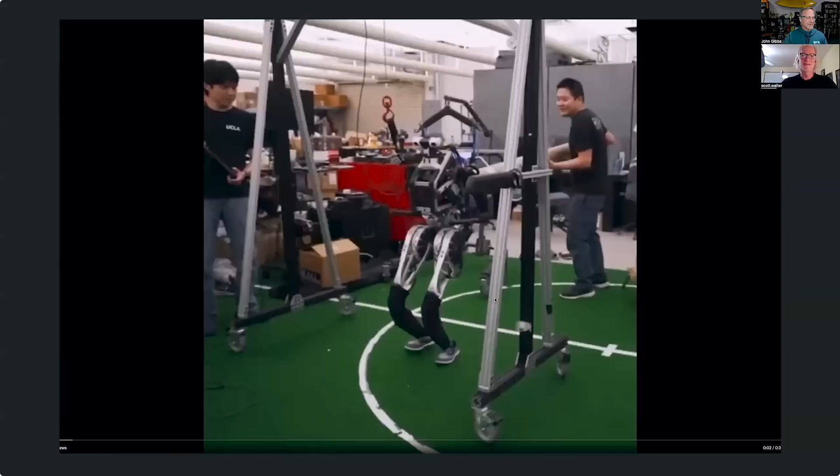I was sad about that one. Okay, I just blew up the screen. Can you still see that? Okay. Twitter's video, Elon Musk needs to fix that still. The video is still less than ideal. But anyway, I've turned off the sound for all of these so that we can talk over it, and I will leave the links in the description so you can go look at it yourself. So you can see that this is a lower body test.

Is he wearing Nikes? Yeah, he's wearing some kind of training flats. I'm not sure whether they're Nikes or not, but it's rather interesting that it's off the shelf. You noticed that this robot is constantly walking even when it's standing still. Yeah, it seems very nervous. Even when it's not moving, its feet are going up and down, I'm assuming because it wants to be ready. Right, it expects to get pushed, so it wants to have everything already running.

And of course, with the legs being bent, there is a little bit of cheating involved. I always say it feels like a toddler walk when they keep their legs bent. Yeah, you can lower the center of gravity that way. But it is reacting really well to being pushed. And this is part of the testing. Dennis retweeted this today and said, if people are upset about this robot being pushed, it's part of the required testing to show that it's functional.

It's stable, right? Because suddenly you can have an outside force that comes in unexpectedly, and you need to see how quickly your control system can react. So what's really impressive is that it has a planned trajectory, something it wants to do, and then suddenly something unexpected happens from the outside. Right. A random event, and it has to recover very, very quickly.

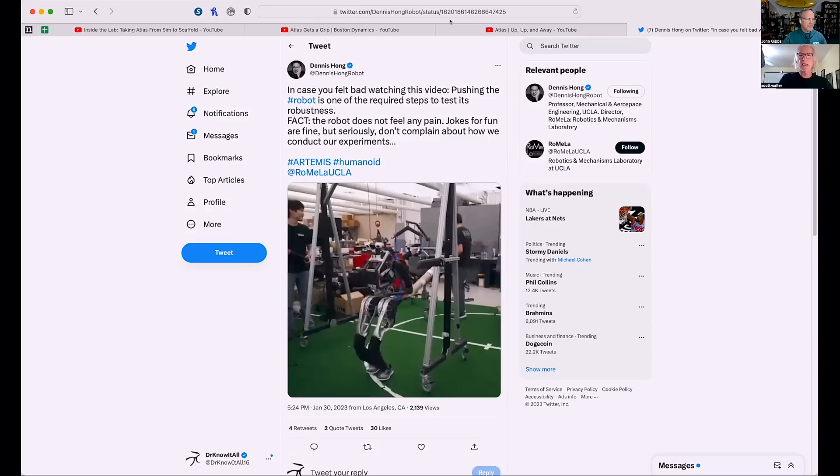And the other thing to notice is that it's not like it recovers in one step. It's trying to dissipate the whole problem that's going on there. Right. So it seems like the strategy is, you don't fix it right away. You try to do something to keep yourself from falling down and get yourself into a slightly more stable state, and then put something else down and it gets a little bit better and a little bit better. And we're sort of used to that.

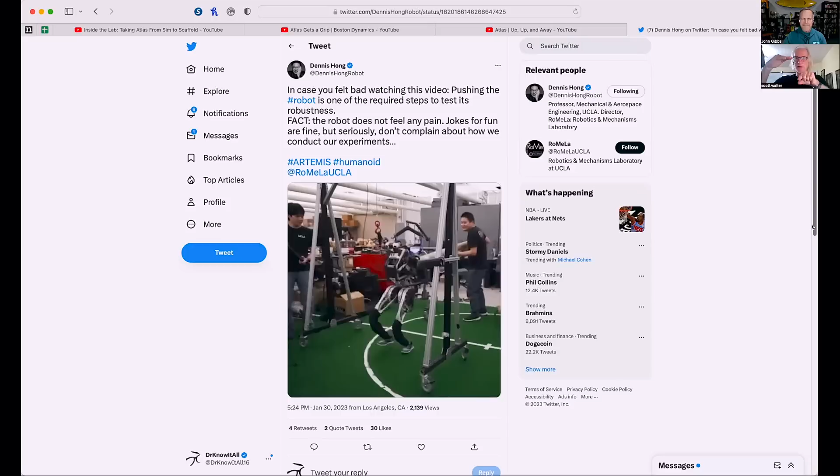If you look at any kind of control system, you try to get up to some level and you're going up like this, and you overshoot, and then you have to come back and eventually get in there. And John, what is that called? When you overshoot in your control system, you get that peak that comes up and goes back down and it wobbles back to it. Do you know what that's called?

I'm sure I do, but I'm just blanking on it right now. What is that? You're absolutely blanking on that, huh? In control theory and Fourier transforms, when the Fourier transform doesn't exactly fit a step function, that little overshoot is known as the Gibbs phenomena. I should have guessed that. I pretty much figured that had to be it.

Yes, it's the Gibbs phenomena, and that's what I refer to, like in the car with ego. When the steering wheel kind of does one of these things back and forth when it's trying to get itself straightened out, I'm going, oh, there's the Gibbs phenomena. It has nothing to do with the way you drive, John. Yeah, that's right. It's all about me.

Have you noticed that the overshoot and the corrections in the turning have gotten better with the last couple versions of Full Self-Driving, at least for me? Oh yeah. There's a turn in my neighborhood where it used to be just like that. And now I have a couple of roundabouts that are kind of small that it just goes through really smooth. Before, it was definitely tessellating the curve, not the way you want to. And now it's like this really nice spline going through.

It was good about 2 or 3 releases ago, and then the latest one about a week ago, it's even smoother. There's still an improvement there. And a few other places, and still some things where it's like, oh, they still haven't addressed this issue and that issue and a few others, but it's improving.

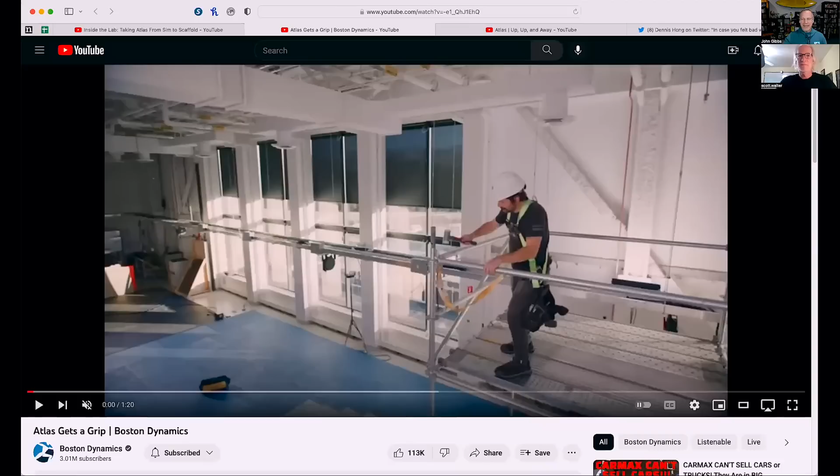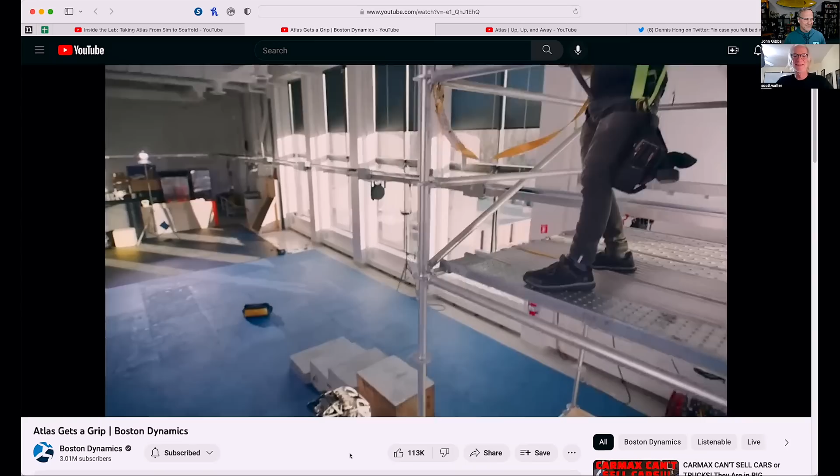But in the meantime, let me show Atlas Gets a Grip, which is the finished video. I think this is actually in some ways the least interesting video, but it's so that people get a sense of what's going on here. Yes. But then they have a couple of behind the scenes that are great. So this guy's like, oh, I need my tools. Atlas, come get me my tools. So there's Atlas. Okay.

But one big change here is that he's got grippers now. Yes. So he's able to actually grab and interact with something like that. Right. Put that up there. So this is all very good. The apprentice is doing what they're supposed to here. He seems to be very eager to help out the boss. And that, by the way, is a soft bag. It's fairly full, but that is soft. So that requires some dexterity to pick something like that up.

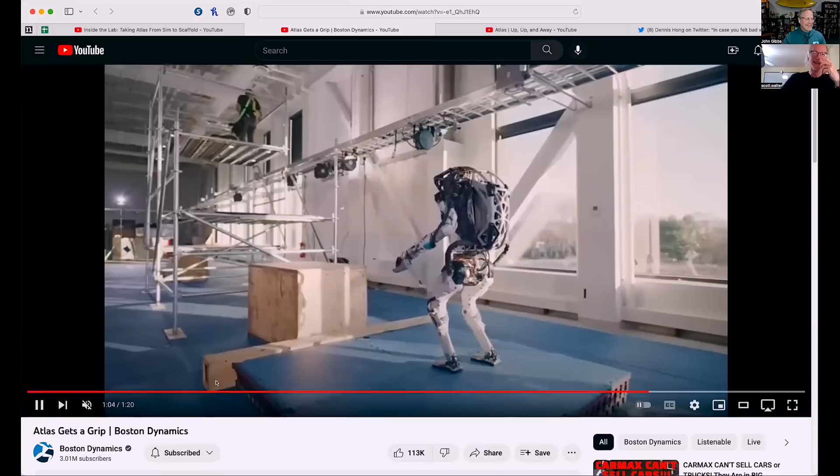Got some tools, right? And that platform is not stable. Oh, did we miss that? That just kind of glitched on me there. The way he threw it up there. As soon as I saw that, I'm like, there's probably an OSHA violation there. I know, right? And there's the second firing offense right there. Yeah, no dismounting through flips.

This is actually very cool, because when you see him run across the stuff, the board bends. It's moving. And all of this stuff is moving. Scaffolding is not as solid as you think. Right. Now this here, that was an OSHA violation. Throwing. You'll get a dressing down from the boss on that one.

And by the by, right here, this is a multi-axis flip, which is the first time they've ever done one. So they're very proud of themselves. Yes. They talk about that in the behind the scenes. Yep, they do. They call that the sick trick. Yes, exactly, which I really like.

But I guess the other thing I'll say about that trick, I mean, anyone that's done diving from a board, or a gymnast, or someone who's skateboarding or snowboarding, these things all have names. Right. And I'm surprised. So evidently there's absolutely no one on staff there that either has kids that were divers or gymnasts, or they didn't think to go out and consult one. Yeah. Because those flips are known. And so they just call it the sick trick, and they wouldn't even tell you exactly what it is.

It's a forward one with a half twist. Okay. It's as simple as that from the straight position. Okay. Because they get the forward somersault. I mean, I can tell you on the dive program. I thought there was like, isn't there like a gainer or something like that? 1021A. That's exactly what that is, if he was going into water. All right. Well, there you go.

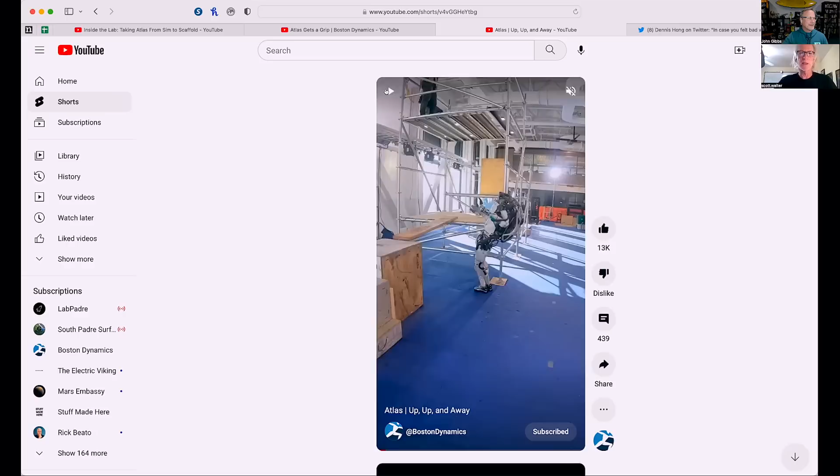Let me share the screen so we can watch this, because this is sort of all the mistakes that were made. This one is great. I like the outtakes better because it really shows you. And sorry, this is a short, so it's vertical. When he tripped there, he really tried his best to recover. Yeah. So there's a reflex reaction there to try to recover. Right. Even that one there, he took out a piece of wood. Did you see him take out that piece of wood? Yeah, he took that out.

And as I mentioned earlier, you see how they have to put him together a lot. So he's been put together more times than C-3PO. So there you go. That's the line.

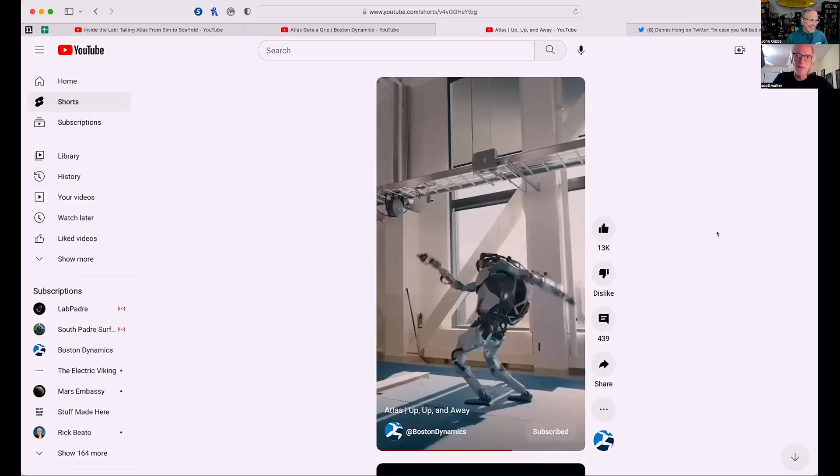Now this one here. Look at that. Look what's going to happen. His feet are going to slip off here. It's really slow, but still it's like, no, I got it. Yeah. But also, did you see the one arm that was pivoting to try to balance itself?

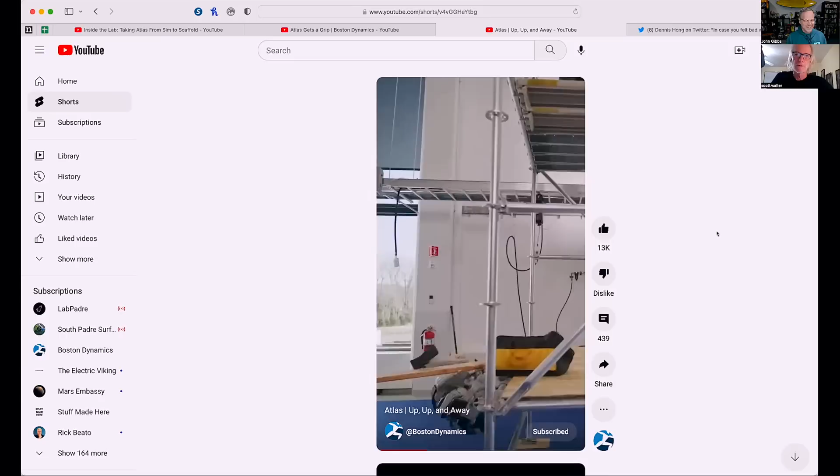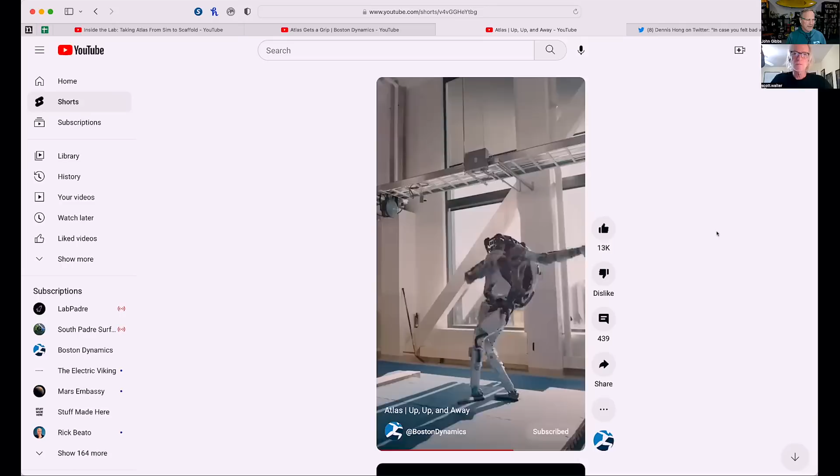Yeah. But still, all very complicated because right there, the arm pivots backwards a couple of times to try to get the recovery. Which again, very human. Yep, I'm okay. Oops, this kind of went off. Yeah, fine. And part of that reaction there, probably because the arms were going up, there was enough reaction force on there that caused that back foot to slip. And then you get that recovery.

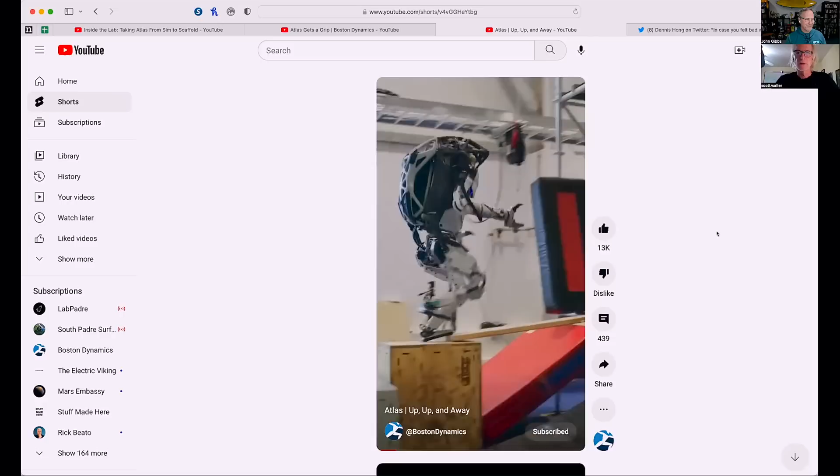Right. Poor guy. Unfortunately, we can't fast forward that back and forth. Yeah, I know. YouTube shorts are just not ideal for this kind of stuff.

But anyway, it really does try. I mean, it attempts to do that. It looks very human when it starts to fail because it looks like what a human would do to try to recover itself. So this is all very impressive, by the way. I don't know how to.

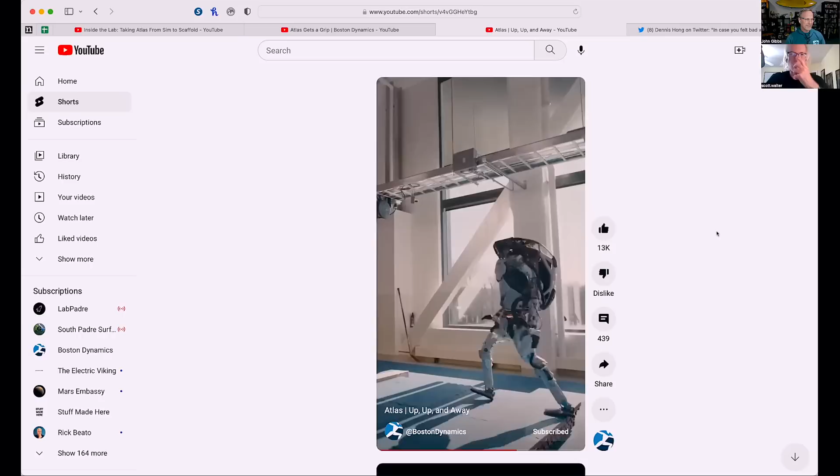Yeah. Now a couple of things they point out is you've got to remember that if you take a basic class in physics, they talk about F equals ma, and it seems very simple. Everything is scalar there, kind of, or at least the mass is a scalar, and everything else might be a vector. But then when you get into rotational dynamics, it's kind of a similar formula, but it's no longer m. It's the inertia tensor or matrix, right? And for standard shapes like a cylinder, or a cube, it's fairly easy, but when you get an everyday object, it's pretty complicated.

Even with CAD systems, and if you know the density of the material and everything, there's some heavy calculation that has to go on to calculate it for every single part. Now, the thing is, as the parts come together, they form this much bigger mechanism, which also has an inertia, which is made up of all the inertias of all the others. And it depends upon the configuration that they're in at any instant. So when you start moving the arm, suddenly the inertia matrix for the entire system changes. And you have to know how it's changing as you do it.

And if you remember the parallel axis theorem and ever having to do that and how difficult that was, it's that on steroids, because it's not just two bodies, but multiple bodies. And you need to know that to be able to calculate the physics right. And if you get that off just a little bit, it's very hard to predict what is going on. Right. You can do it to some degree and some success, but it is challenging.

So when they're doing those simulations, they're doing their best to try to figure out what the launch force has to be and the angles and everything to get what we need. And they get a pretty good guesstimate, and then they go out and they run it. And then they see, oops, it's not quite there. He's broke. We got to fix him. We got to put it back together again, and try again.

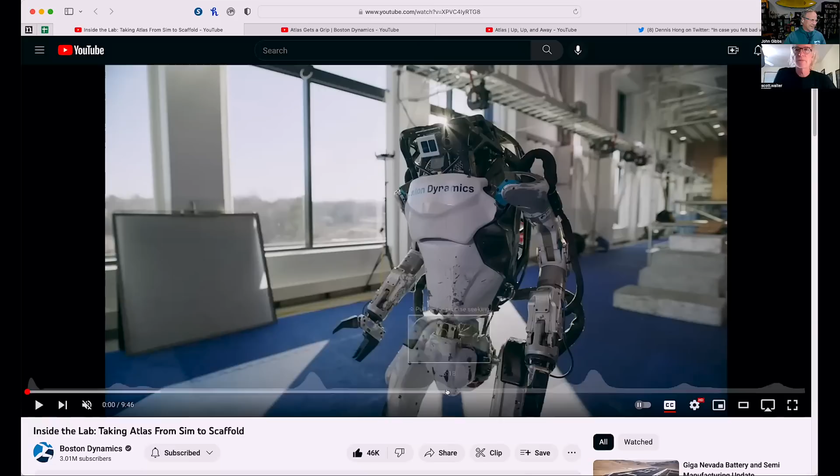And you have all those things that you kind of know ahead of time, but then when you go and grab an object, and that object becomes part of you, now suddenly you've changed your inertia tensor. Yeah, that's true too. And this is a really good video. I figured we'd play this while we talk, but you can see him picking up. This is a heavy object, so this changes his whole center of mass.

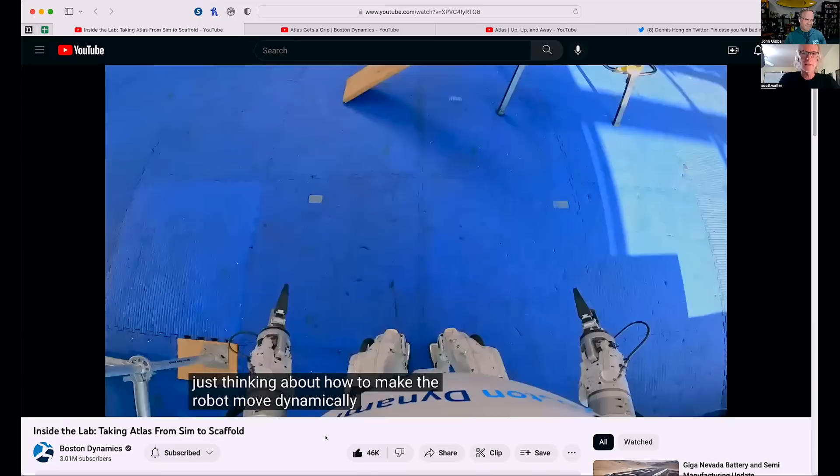These POV shots are really fun. I really like that when you can see, especially when it flips. But in some of these parts, they show him picking up bar weights, which are substantially heavy. That's what I was going to point out. It's not just that they're heavy, it's the fact that they're not a point mass.

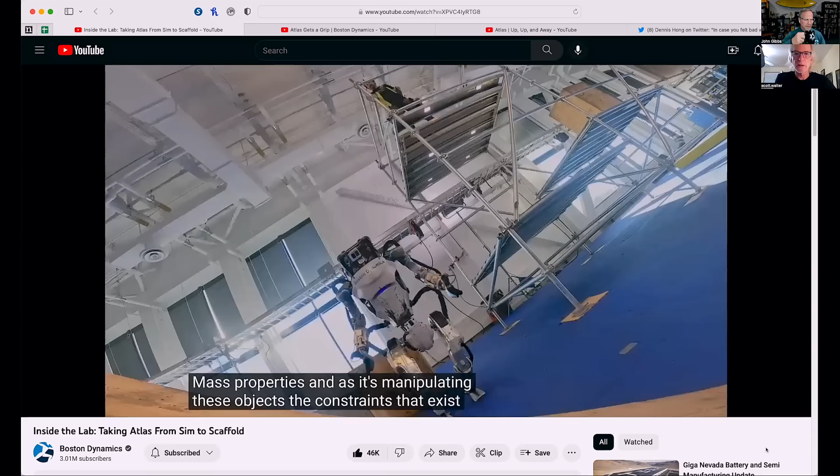Yes. So the easy way to think of that barbell is, oh, it's just a point mass. And that's how we simplify it. So what you can do is say it has a center of gravity, right? And all the forces are going to the center of gravity, and we just take that mass and put it there. You could do that, but it's kind of a shortcut.

It's going to throw you off, because the fact is you've got two 50-pound masses to the left or the right of you that are going around, and that's the inertia that is causing you the problem. It's why you cannot think of it as a scalar property, but you have to think of it as this tensor property.

And as he's running around, that is what causes him to tip to one side. He could have taken that same mass, and if it was concentrated right in his middle, he would not have fallen over. But the fact that you've got that on the outside is going to give you that little moment that's going to cause you to lose your balance.

Right. And that's something the control system would like to know about, because if it knows about that, it's a lot easier for it to understand what it can and cannot do and not attempt something. We know we can all run at a certain speed. But if we now put a really heavy backpack on you, suddenly it's very different. You realize you've got to change your stride and everything else.

It has to try to do the same thing. And how do you inform that? Does it just suddenly realize, I feel a bit sluggish here, I must be carrying a really heavy weight? Or do you tell it ahead of time, guess what, you're carrying something heavy, you might want to take it easy?

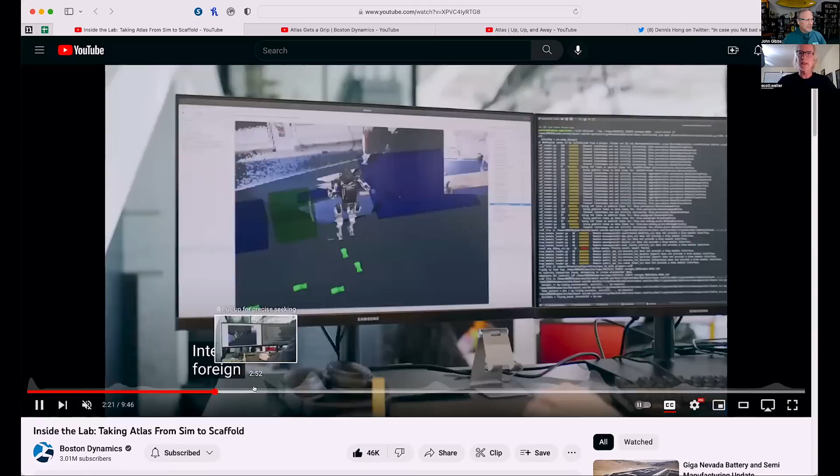Yeah. I'm trying to find the spot; this is a lighter weight, obviously, but there's a spot where it's running with a heavy weight and then it tips over because it wasn't properly balanced. All it took was that little bit of a tipping moment one way or the other. It may have been just a little bit off center. It didn't quite grab it right, so it was a little more to the left and then a little to the right.

Now, the big difference between Atlas and Optimus is they're very different use cases. When you're an engineering student, you first take your classes in statics, which are fairly straightforward, where you learn how to figure out whether your bridge is going to fall down or not. All your forces are static, there's no movement, and you can almost do the calculations by hand.

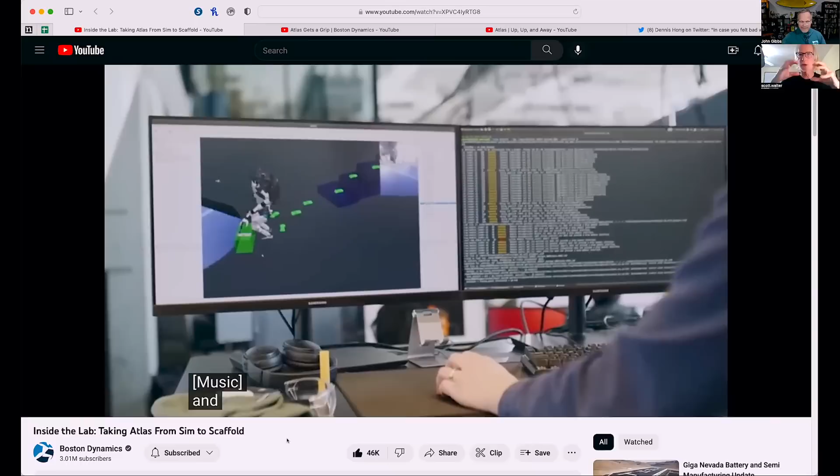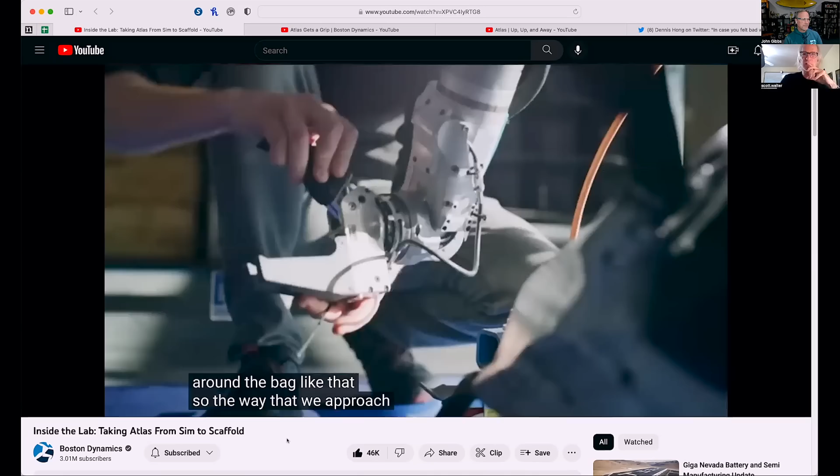But dynamics is when you start having a lot of motion, forces that are no longer static but constantly moving around, and that becomes a lot more challenging. So long as you're not moving very fast, you can kind of cheat and almost pretend your system is static. But once you get a certain velocity, it truly becomes dynamic. And Optimus is kind of in that range.

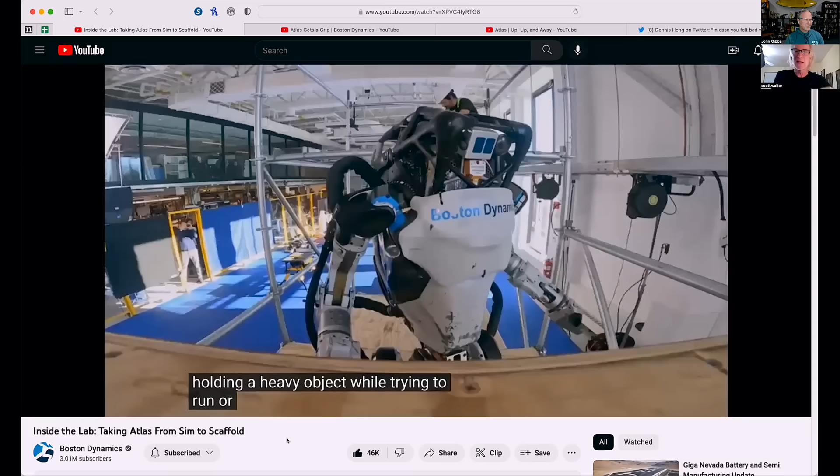It's like, well, there's a little bit of dynamics here, but it's not a whole lot. So it's a lot easier to kind of manage it. But you see, the name is in the company. It's right there. Exactly. And so they need to know that. And you definitely are going at velocities there where dynamics become very important.

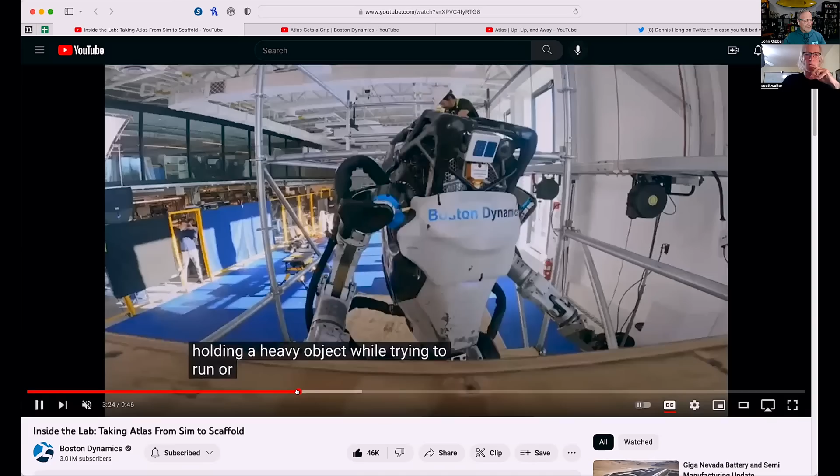They contribute. Here it is. Forces and torques. And boom, right there. And then suddenly it's like, whoa. Oh, and I noticed this is also the most replayed moment. So that's the spot where everybody went back to look. But so this is the thing where you can see there's a moment arm to that, and it's just hard to fight it.

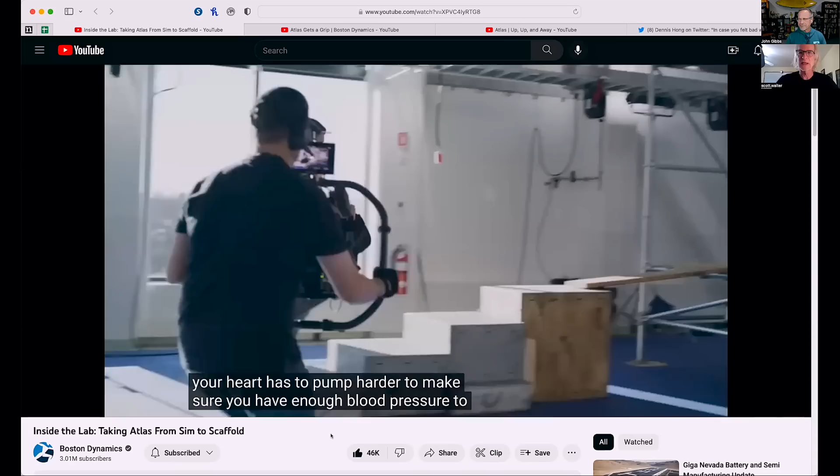The thing is, he's tipping, and right now his pivot is on that foot, and that's the foot he needs to extend out to try to break it. The problem is he can't get off the foot because there's just too much weight on it. And so, okay, what can I do here? It's when he collapsed. It's like he just went bang. I assume that there just wasn't enough torque on the motors to be able to correct for it.

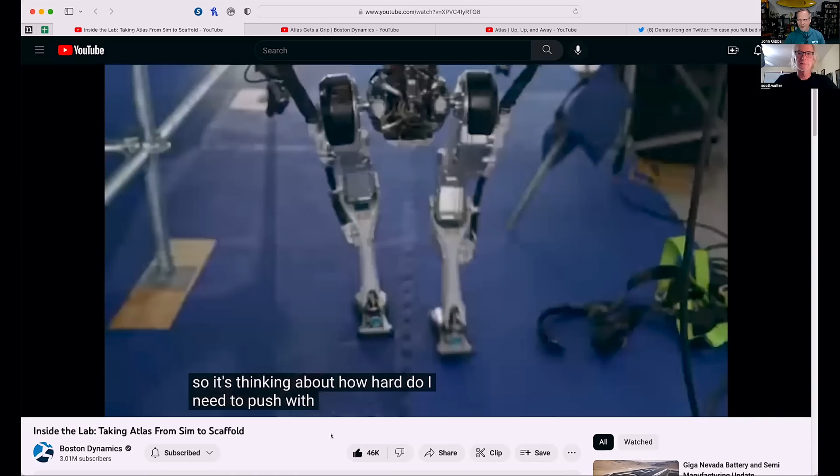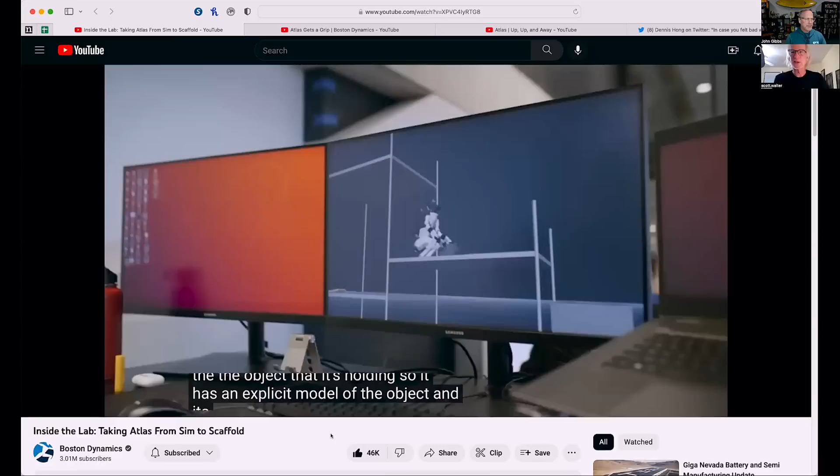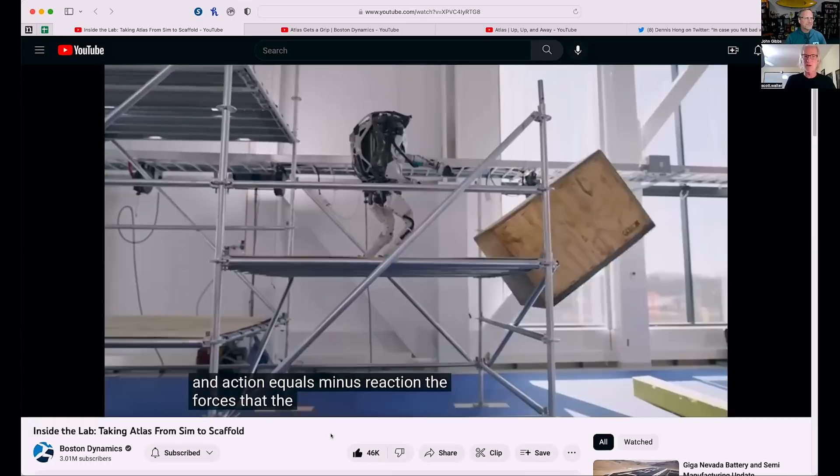The thing that surprises me is they don't have some sort of reflex reaction in there, like a fetal position, that it's going to know I'm tipping, I'm falling over, and just automatically get into that tuck and roll. Like what do they teach the newbies? Us Gumbies, when we go climbing with you, John, to a bouldering gym, the first thing they do is show us how to fall well. They will not let you climb there until you can prove you can fall correctly. And that is crouching in and doing a very simple somersault.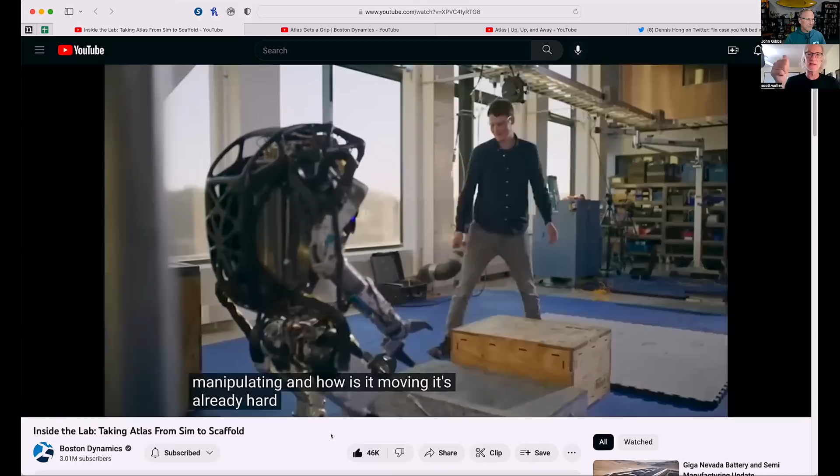Right. But on the good end of things, it doesn't do the classic human mistake of putting your arm out, which often breaks your wrist. Oh, the thumb. They say that's the most common injury in ski areas. So you just catch it and... Oh, there's a name for it. It's called like a FOOB or something, there's actually an acronym for it. I have to ask my ski patrol buddies what that was called again. But that's a very common accident.

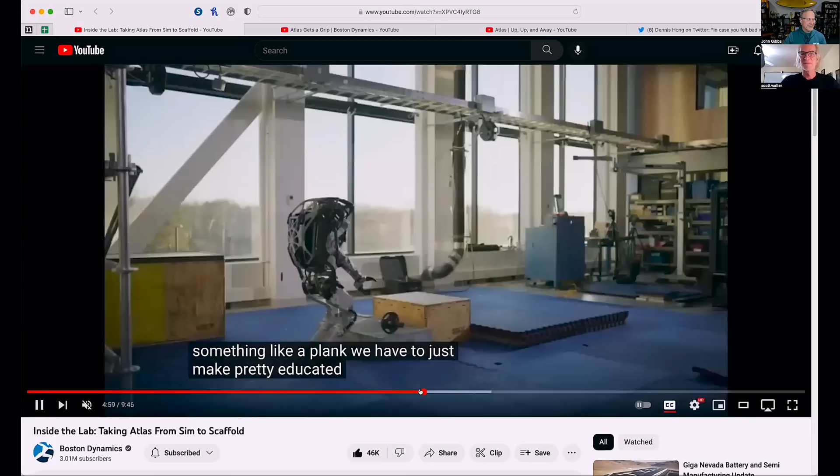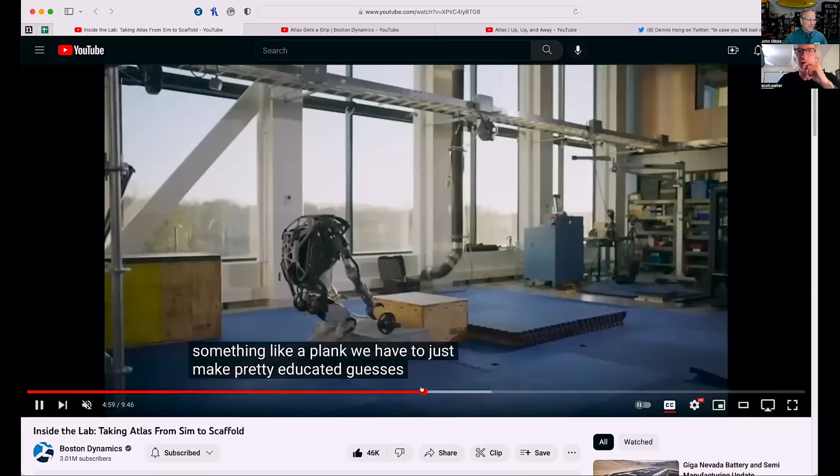Oh, he tried. So again, you can see where it just miscalculates. I mean, these are very, very complicated. Now, for anybody who's asking, that's a good move right there. Oh, it is. This is a fantastic move too. But it's got too much weight, so it couldn't get the upper torso up. That would have been clever. Yeah, they're trying to take that weight and pull it right into the center of gravity of the system when they go up, so that it rotates, almost using the weight to help them pivot around.

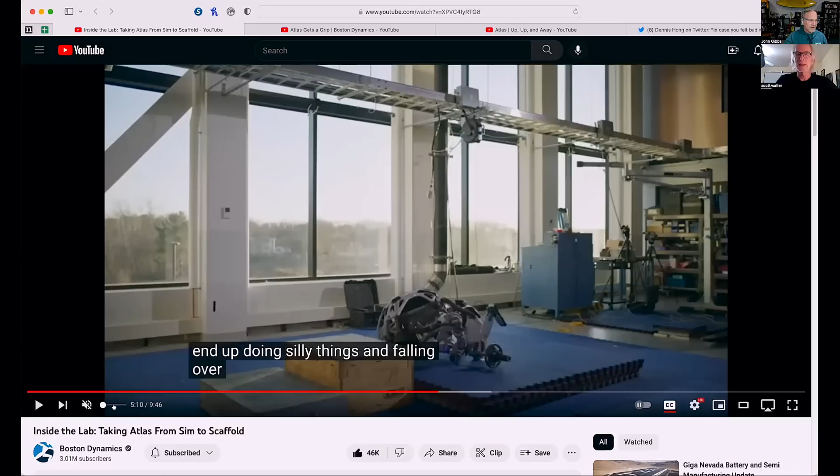I did see that. It raised the weight up and tried to pull it down, which I think is what you do when you do flips. You often use your arms that way, you throw your arms down. Your arms are very important for that, to get the reaction you want. Right. And cats are really good at that too.

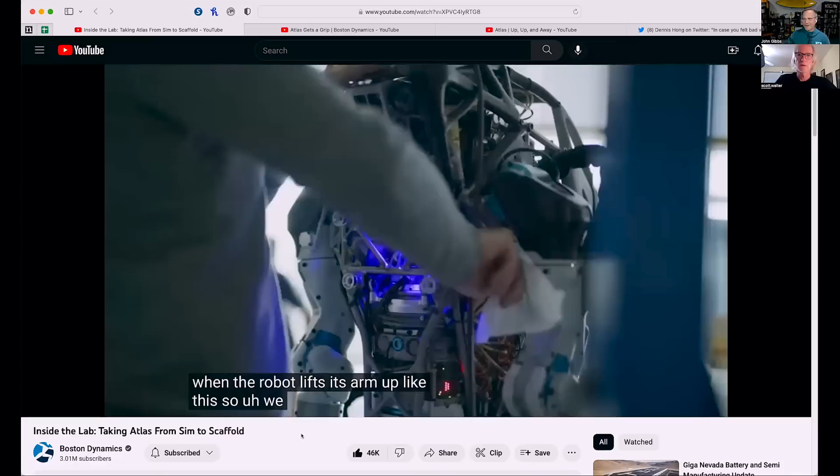One thing to be very clear with the audience: if you think this robot is making this up as it goes along, it is not. They talk extensively about how they script this. They use a physics simulator to go over and over again to figure out how to make it work before they even throw a real robot at the situation. So yes.

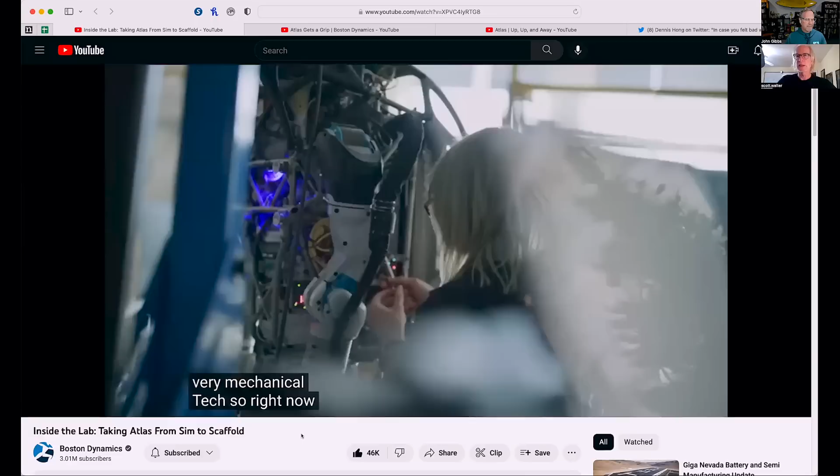One of the tools they really have here is a simulator, which has got to be an excellent simulator, really good at simulating all the physical properties of what's going on. Oh yeah, because when you're pushing off a surface, you need to know, is that a compliant surface or a rigid surface? What's the coefficient of friction that's going to be there?

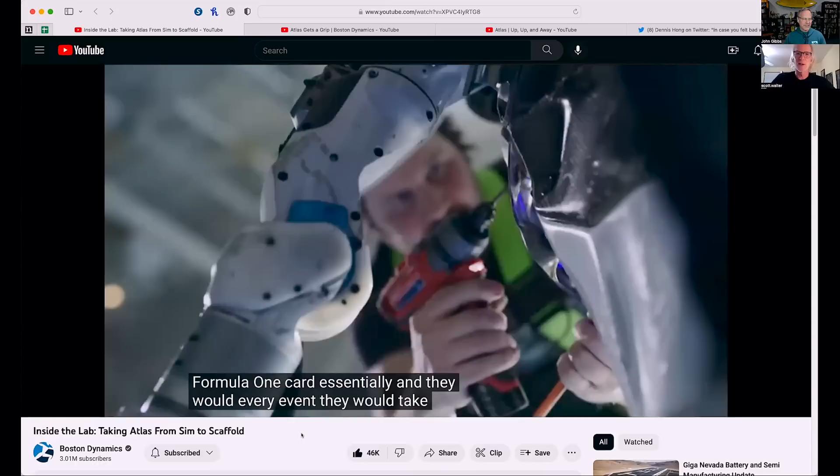If you don't get those right, then what you end up getting out of it in the air is a little different. That's why it was interesting to see, you know, everything they're on is not very rigid. That scaffolding is not rigid. That's plywood.

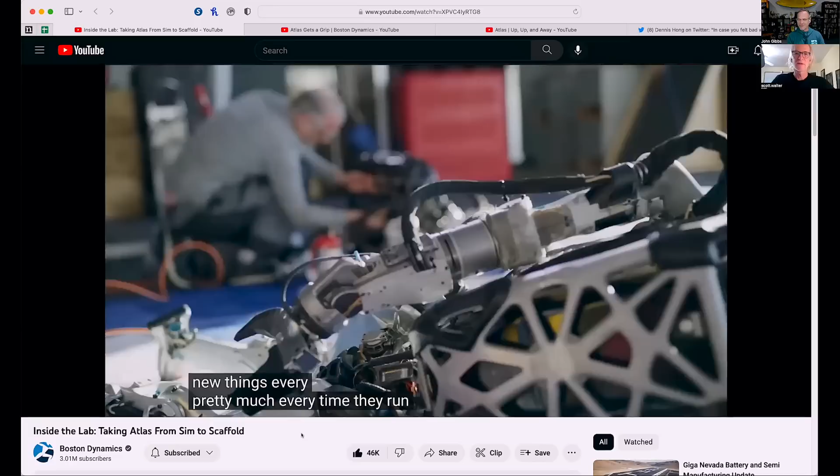No. And that's the part that impressed me the most. I actually just realized what they should have is a demo of Atlas ice skating. I think that would be an impressive demo for it to have its balance and to be able to understand almost zero friction, very, very low friction surfaces. That would be really cool. It might even be worse. I mean, sometimes friction is your friend, in a lot of things. Oh no, that's what I'm saying. As much as we try to get it out of systems, a lot of times you want it actually in your system. Yeah. Well, most of us adults can walk, but not very many of us can ice skate well, you know.

I guess he's doing Donkey Kong or something. I don't know. Yes. Yeah.

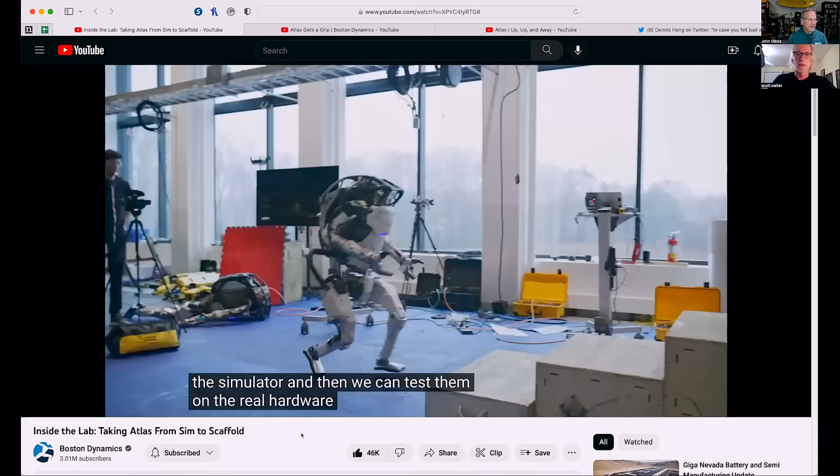So you see, it was in the simulator, and now they're trying to get it to do the same thing, and then probably looking at the feedback to see how much that actually matches what they wanted it to do. Right. And they had some encoders in there that went bad previously that they had to replace. And that's very important. If the robot does not know where it is, it's not going to be able to continue the execution.

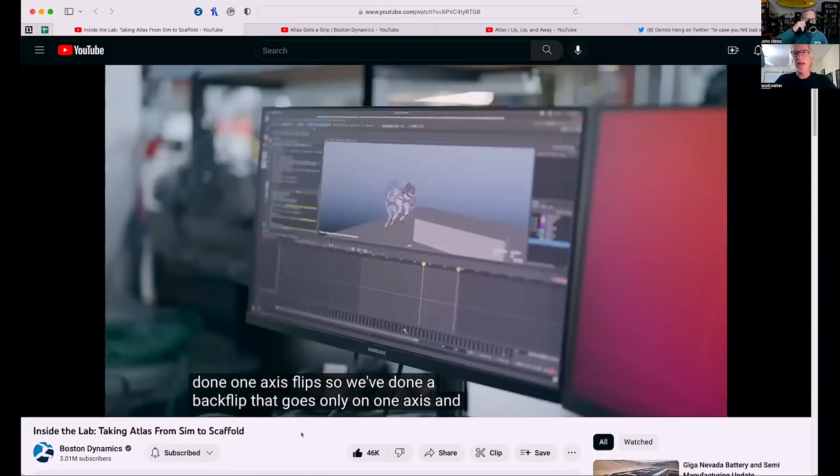Right. And that's what I sort of wonder when they do that flip. The human is using their eyes. I don't know how much they're using their own internal IMU to figure out where they are. We have a slight sense of that, but the robot would have that. So I wonder how precisely it knows where it is in its roll, so that it knows when to kick out in order to stick the landing, or whether it's just based purely on time. Because if you do it on time, that just means that you took off exactly the way you expected. Right. And if there's any error, then it's very hard to correct.

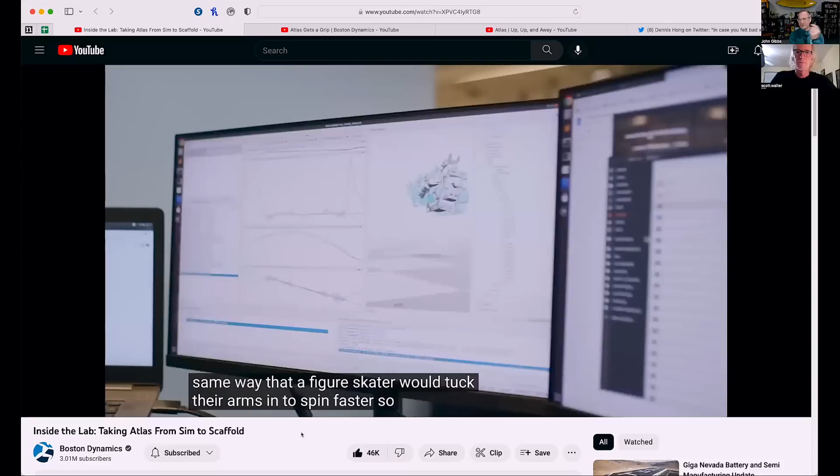The interesting part about this is it looks like they're doing a lot of this based on time, and we just happen to be watching that part of the video right now. But if that's the case, then how does it know that recovery when it actually strikes the pad? Yeah, well, that's got to be updated. You get the real planning phase, right.

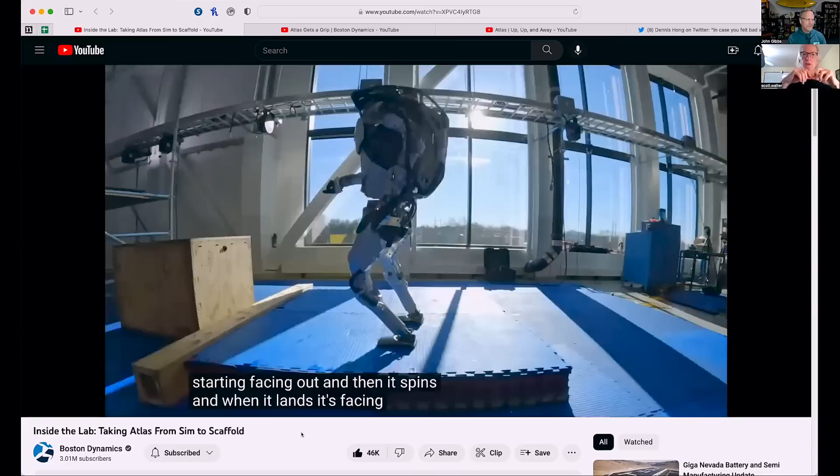You've got the planning phase, and the way to think about it is that if you're driving from your house to Atlanta, you know that you've got some milestones along the way that you expect to pass at a certain time. So long as you're hitting it at that time, you know you're going to make it to your meeting on time. But if you're a little bit behind, that means at the next milestone I've got to go a little bit faster in order to make it. If you're doing fine, you might be all right. And if you're way ahead, you might say, I can slow down, be a little bit chill here and take it easy.

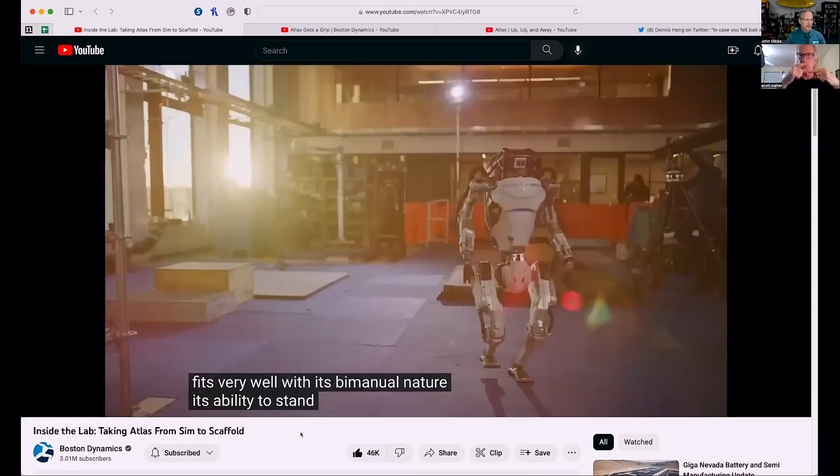So what they do is they plan a trajectory, and they know exactly where they need to be at every single millisecond along the way. And then they're constantly measuring to see how close we are to that. If we're a little bit behind, they try to do something to speed it up. If they're a little bit ahead, they try to do something to slow it down. That's exactly the whole idea of a control system, is that you're trying to match that along the way. And if you get too far off, then you're injecting a lot in there. You get these high gains, and that's when a lot of times you overshoot.

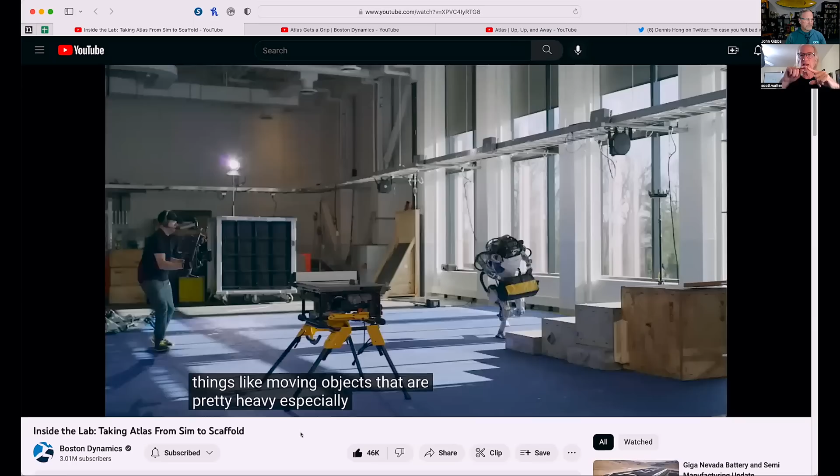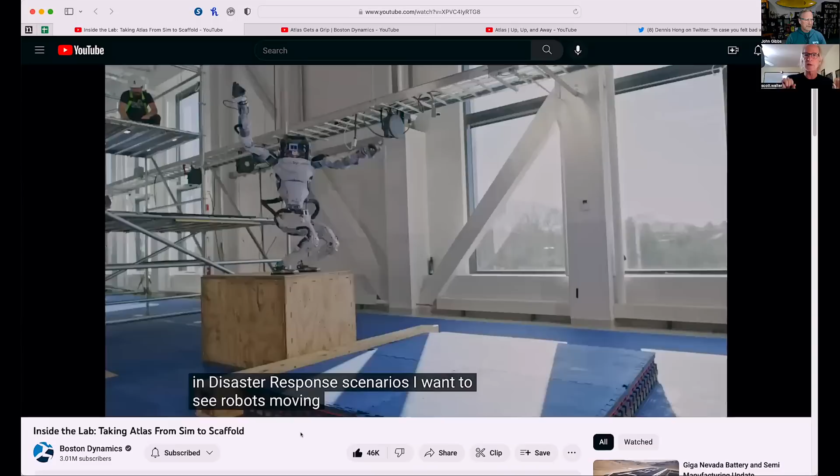Right. And so the problem can be if you plan a trajectory where physically it's not going to do that, it's just going to deviate right from the very beginning. Your control system is working really hard to get you back on what it thinks is the planned trajectory. So the better that you can model the physics to understand that if we inject these forces into the system, because we've modeled the inertias just right, we know this is where we expect to be at every instant in space, then we know we're on target there.

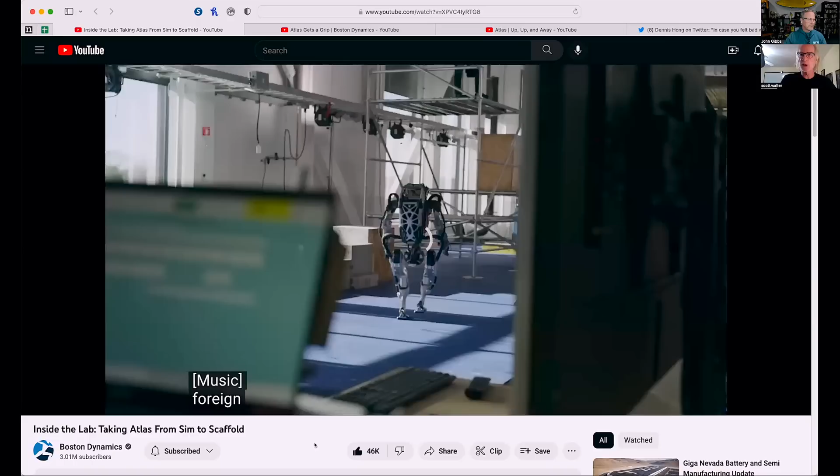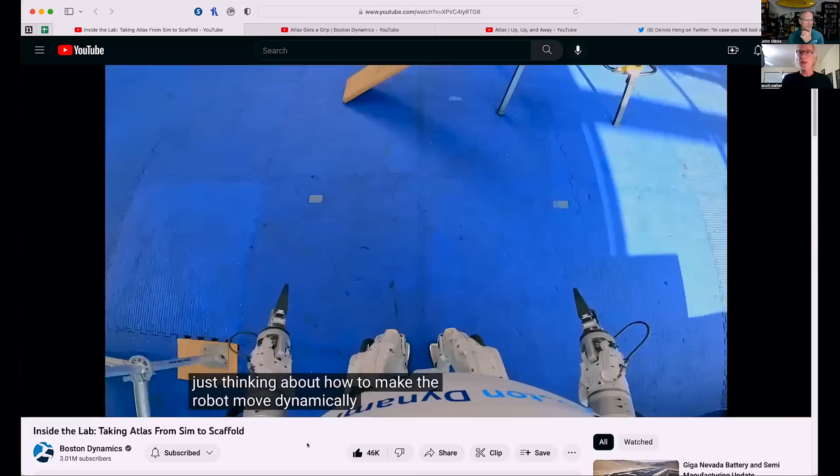Now, if you change your inertias, like he suddenly picks up a box and does this jump with a box now. We have no idea how much the box weighs or anything, and you try to do it, then you're going to be way off and you're going to have to somehow correct. So assuming you don't have that, and they've modeled it really well, as you're going through the air, like I say, the only thing that you can do to control your spin rate is to change your inertia. And you do that by either pulling in or pushing out, and then sometimes getting that leg kick.

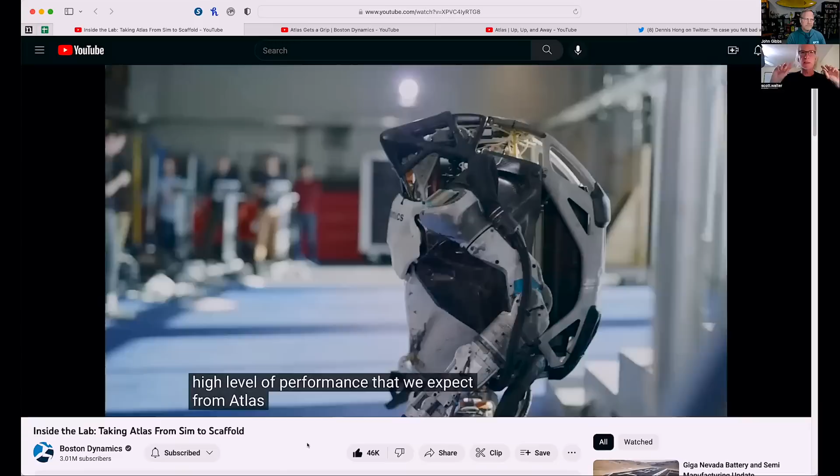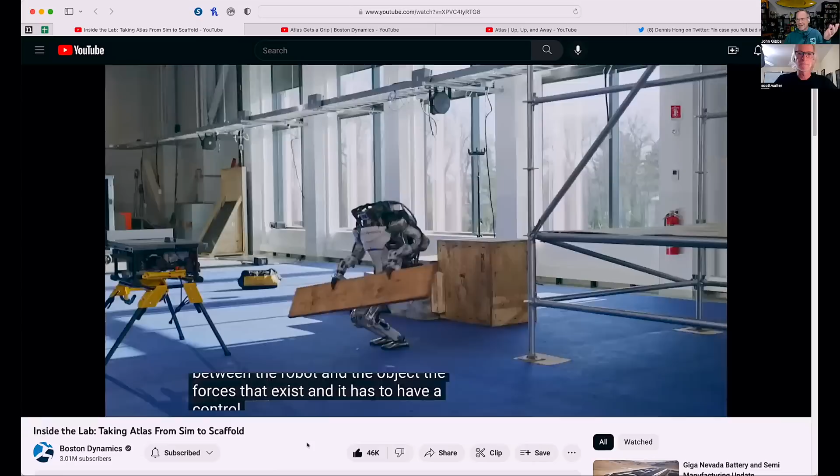And that's exactly what a diver will do and a gymnast will do to stick it, is that they see where they are, they know where they are, and then they kick out. Right. And so it is an interesting combination, because even though all of this obviously is scripted and they actually had an animation engineer who designed the animation, so clearly it's all there. But as you say, it's got its IMU and probably also its sensors and things like that. And every couple of milliseconds, it's updating its status and saying, am I good? Am I in the middle of it? Am I too fast, too slow? Things like that. Adjust speeds as it goes.

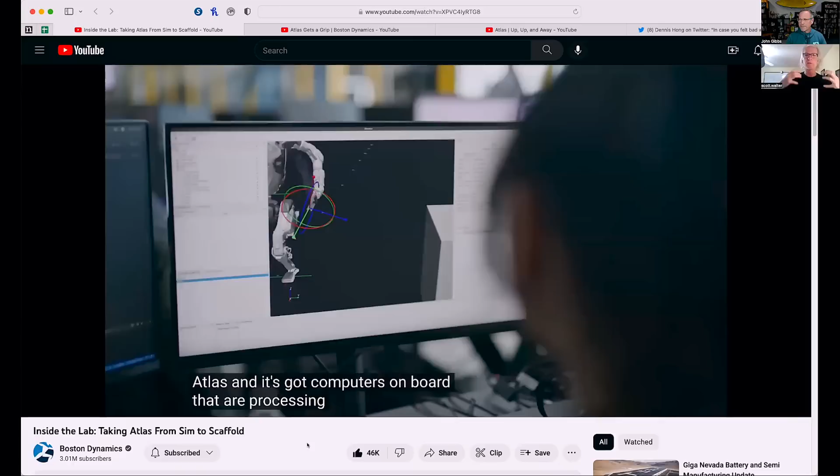Right. And they also have to know the angles of the arm. So they get the one thing that's probably just telling it where the center of gravity or the center of the whole system is that they're measuring. Right. And then, they said that X encoder was gone. Well, that's really important. If you don't know whether the arm is at this angle or that angle, it's pretty hard to know where it needs to be for me to change my inertial properties.

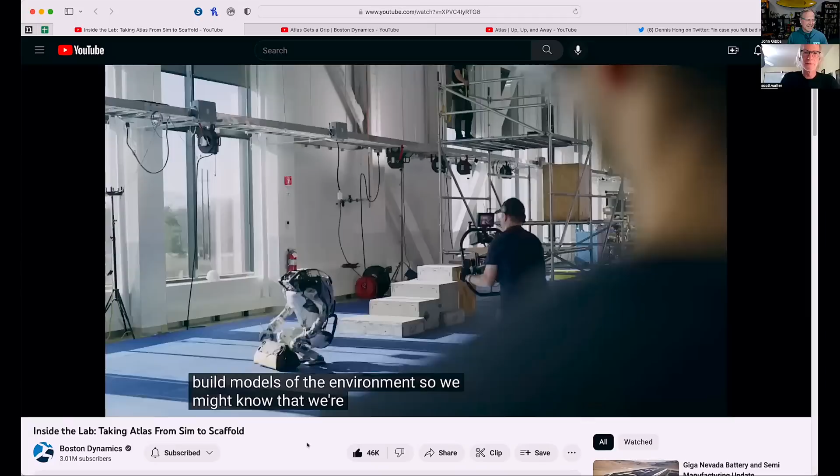Yeah, I noticed that was something that was a complete showstopper. They were like, we don't know where the x-axis of the rotation is. It's like driving without a speedometer. Exactly. I have no speedometer now. It's like, well, we better fix that before we decide to do it. So anyway, it's very, very cool.

Up and away. Can you see this when I just switch this over to this other one or not? Yes. Okay. So let me see if we get to the right spot.

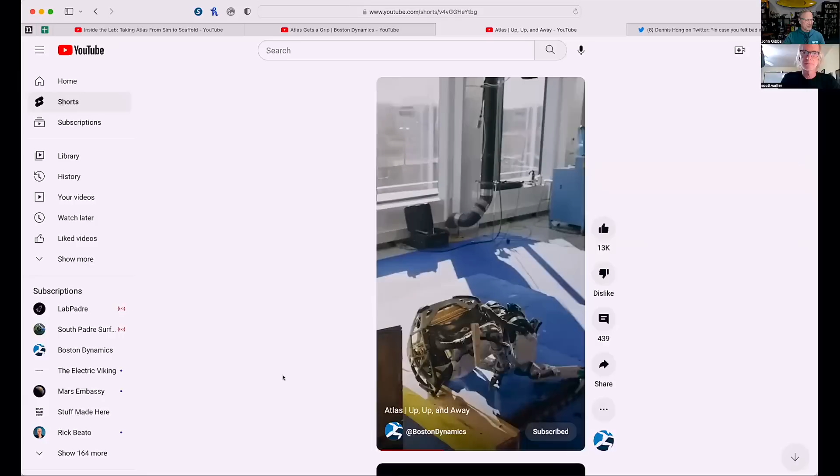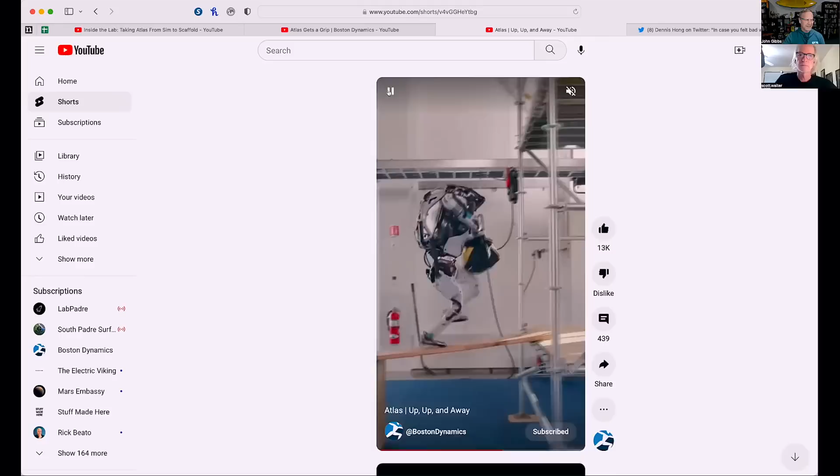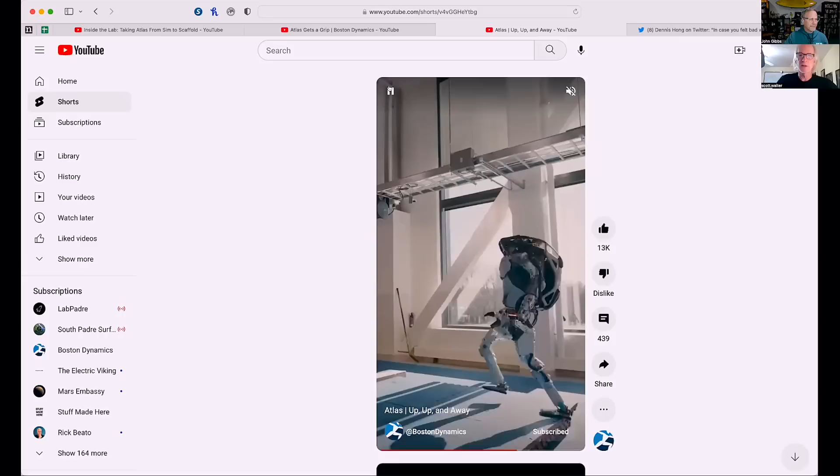It's that one where it actually puts its arm backwards, which tells me it's doing things in real time. And actually that one too, that we just did, because it's having to compensate for making mistakes. It's not quite there. Yes. So they're giving it a task. So there where it was doing this, that's obviously not scripted to recover. Yeah, exactly. So they have something else in there to make sure that it's able to maintain its balance. Right. So one thing is, we want you to try this thing, and the other is whatever the control system tries to do to keep it in the correct position.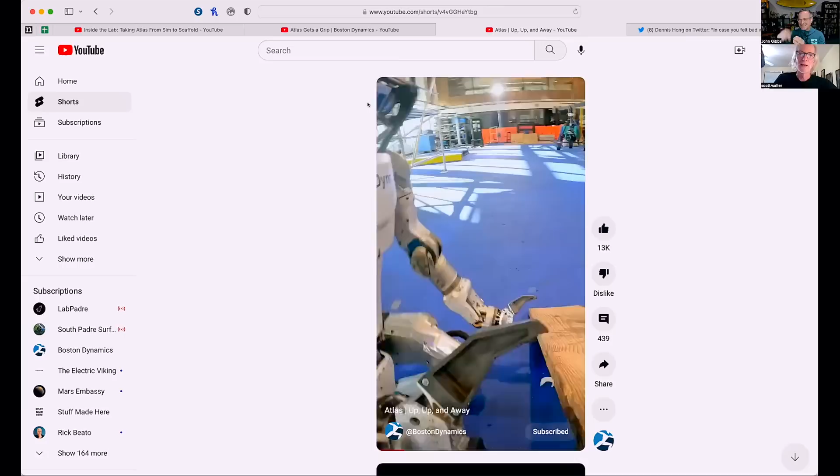Yeah. So again, comparing it potentially to Tesla full self-driving, there's sort of the primary loop, which is don't hit anything. And that's the thing that's constantly updating. And so you can imagine. What did you see? I was trying to think, did it trip, because I think it actually caught its heel when it fell over the other time. I think what happened is that it hit its own heel. Yeah, let's look closely. I think something actually tripped it when it goes back. Okay.

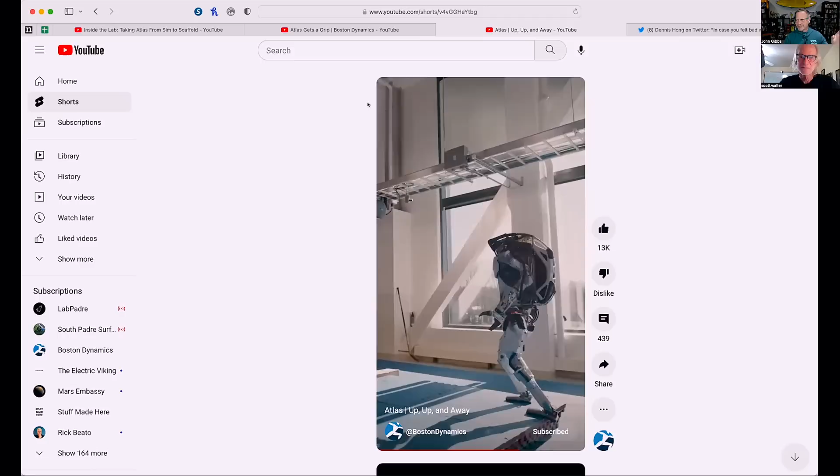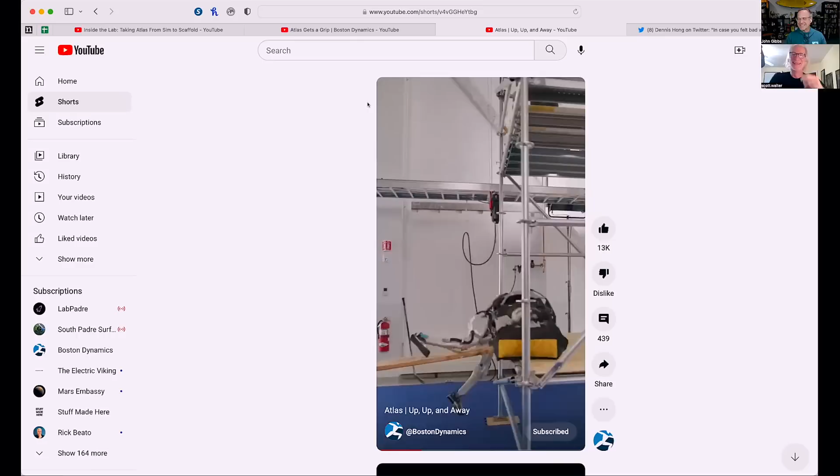Yeah, but again, the basic thing it's doing is stay upright, don't fall down. So that's probably this little internal loop, whatever you have to do. And then external to that is, okay, walk over here, pick up this bag, do these things. And so it's got the two competing dynamics going on. So right there, let's see this. No! It actually did. It crossed its ankles. Yeah, a classic skier's mistake. It really is a klutz. Yeah.

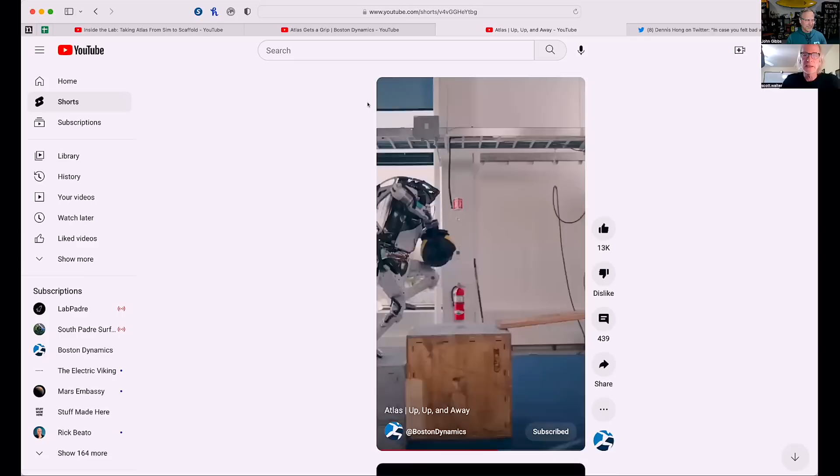Okay, that's what it was. It tripped itself up. Right. Okay. I appreciate Boston Dynamics for putting this up. It's in some ways more valuable to see this than it is to see the completed project. It's far more impressive to see really what has to go into it, and you can see that. No, this was not CGI. This is really something they had to work on to get this mechanism to do that.

It's also impressive to see what RoMeLa was doing, and the other thing is, Tesla, just don't keep releasing old videos. Give us something new to work with. Come on, Tesla. Yeah, I was actually really excited when they released that video, and then I went back and watched it versus the original one. I was like, deja vu. I just wanted to make sure there was nothing new stuck in there, but it was the same. I had looked at the initial release frame by frame so many times. It was like, yep, I've seen this.

Yep. It looks identical. But anyway, obviously RoMeLa Lab is a university lab, so it's not quite the same level of polish that Boston Dynamics has, but it's also really valuable work that they're doing. This is multi-axis recovery, which is really cool. And I'd seen that with Boston Dynamics. They've done that before, where they had the guy with the hockey stick poking the Atlas. And I'm sure we'll see eventually something like that for Optimus. It's going to have to go through a similar test.

Anything else you want to talk about to finish up? Some connecting the dots. Oh yeah, so what do you think about, first of all, Project Highland? I think that was brilliant on his part. I did not realize the one before River Rouge was the original Ford factory. This was Connecting the Dots, a great video that came out, actually I think it was yesterday. Today's Monday, right? Yeah, I think it was yesterday.